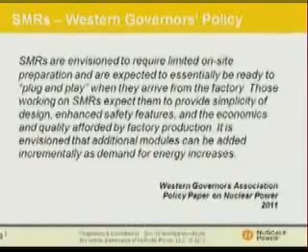This language is out of the Western Governors Association policy paper on nuclear power, completed last year, led by Governor Otter of Idaho, referencing the important role that SMRs can play in energy production and our economy.

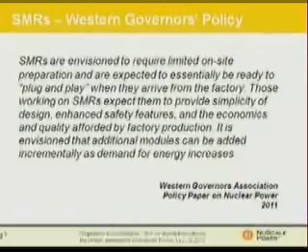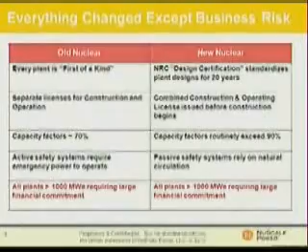So what's happened in nuclear power? I put this chart together because this is what I've witnessed in my career in commercial nuclear power. I'm not an engineer, I'm a business and marketing person, but what happened in the old generation of nuclear power is that every plant was first of a kind. We have 104 operating plants, and except for those that are twin units, every other plant is different. There's no standardization. Now, with the NRC's new process of design certification, we standardize the plant design for 20 years.

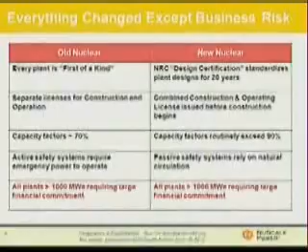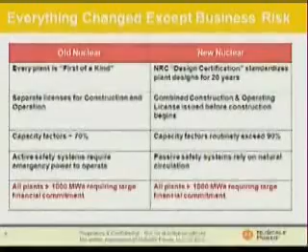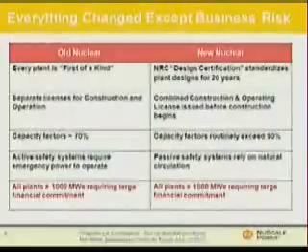And with that, we get the economy that comes from repetition and standardization. As John alluded to, there used to be separate licenses for construction and then a second for operation. That operation license was a big risk that utilities took on. Plants such as Shoreham, such as Seabrook were delayed for years. The owners had to carry the cost of those plants on their books and all of the accumulated interest, which could come to hundreds of millions of dollars a year. Now there's a single license issued at the start. A combined construction and operating license is given before the owner breaks ground.

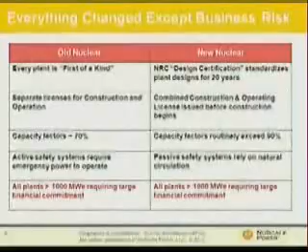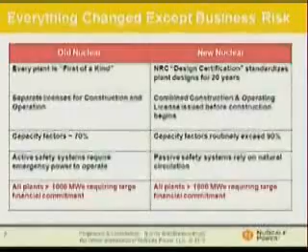The old nuclear fleet up until the mid-90s operated at capacity factors of about 70%. Now the fleet average is in excess of 90%. Some companies like Exelon have fleet averages of 93%. Well, each 1% of operation for a 1,000 megawatt plant, that's 3.65 days of additional full power operation. It's about $5 million in power production right to the bottom line. So moving the capacity factor from 70% to 93% was huge for the industry.

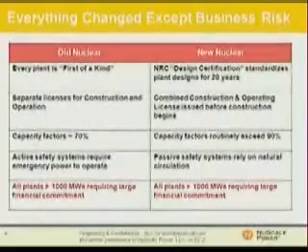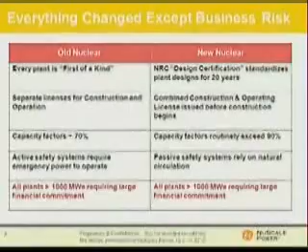In the past, all of the big plants had active safety systems, right? Required emergency power, emergency backup generators. Now the designs for some of the large plants and for all of the SMRs are to rely on natural forces like natural circulation, passive cooling for cooling in emergencies.

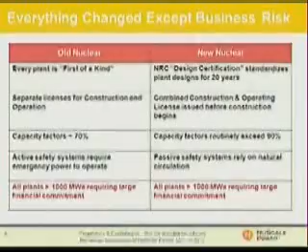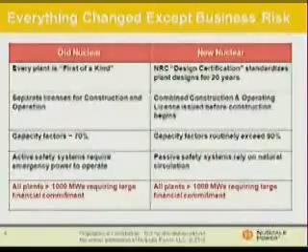In the past, all the plants were large, 1,000 megawatts or more. And in fact, kept getting bigger in order to achieve economies of scale. Well, one of the things that didn't change until small modular reactors like NuScale came along, all the plants were big. In fact, they got bigger and bigger. They got to 1,350 megawatts, 1,650 megawatts, 1,750 megawatts, a tremendous amount of electricity on one shaft, 3 Bonneville dams on one turning shaft. Well, SMRs are changing that.

What's driving the market? I think this is also important information for your Commission's consideration. Aging infrastructure in the United States is going to be a big factor driving the market. We have 330 gigawatts of coal from 1,100 plants.

Half those plants are more than 40 years old. John talked earlier about the retirements that are taking place. We are seeing no new coal plants built in the United States. In fact, we've seen 230 plants canceled.

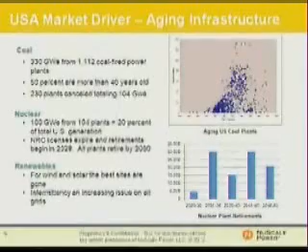Another factor that many aren't paying a lot of attention to, but I think is critical, is that we get 20% of our electricity now from those 104 operating nuclear plants. Even with life extensions to 60 years, all of those plants will be forced to retire by 2050. So the United States faces replacing somewhere between 40 and 60% of its existing infrastructure in the next 40 years.

And then, of course, there's a lot of effort going into renewables. Renewables are great, but many of the best sites for renewables are now gone. And the more renewables we have, the bigger challenge we have integrating them into the grid.

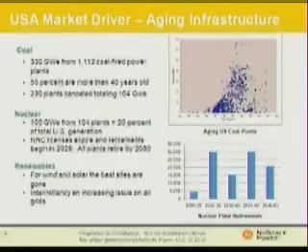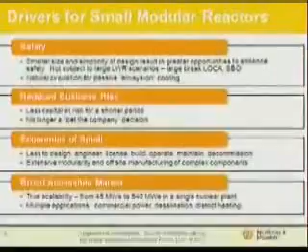So, the drivers for small reactors, the first is safety. With smaller size, we get simplicity, we get a better opportunity to take advantage of passive safety systems to improve the safety of the design.

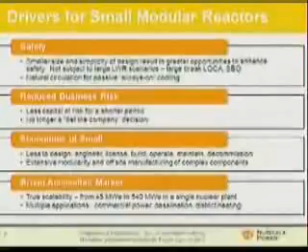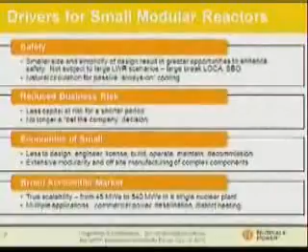Less business risk, right? For the capital cost, there's less money at risk for a shorter period of time. The capital cost of the plant is dramatically less. John mentioned a 36-month construction cycle that they hope to achieve. That compares to 60 months or more for a large nuclear plant.

With the economies of small, and I'll talk more about this, we've been able to take many components out of the plant. So there's less to design, engineer, license, build, and operate.

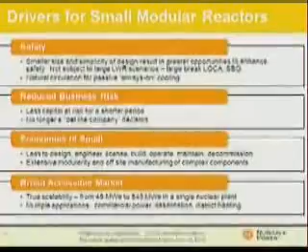We also are striving for as much modularity as we can to get all of the components into a factory and manufactured there. And in that factory setting, you have people whose skills continually improve, you get quality improvements, and you get the benefits of learning by doing.

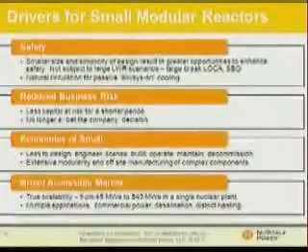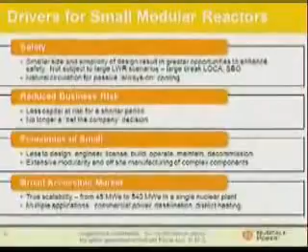And then SMRs have, in our view, a broad, accessible market. For our plant, we have designed a reactor that's 45 megawatts electric, scalable up to 540 megawatts in a utility-scale nuclear power plant. So we think that can bring us into markets that nuclear power never could go into before. And then there are multiple applications for these designs, not just making electricity.

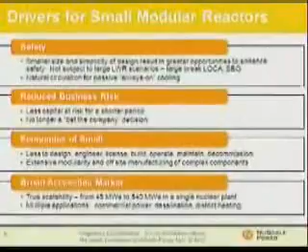We have tremendous interest in desalination in the Middle East, in Northern Europe, in China, in India, a lot of interest in using this technology for district heating.

So, because of the belief in the economies of scale and the need to get bigger and bigger, at NuScale we've coined this term economies of small. And the acceptance of SMRs really has required a paradigm shift on the big nuclear guys. They've always believed that you had to have these big nuclear plants, and it's taken them a while to say, okay, maybe there is some benefit and there are some economies from small nuclear reactors.

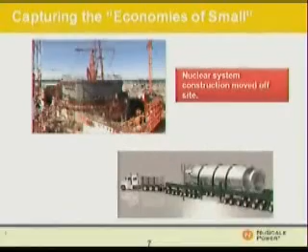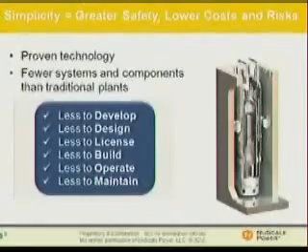As I mentioned, simplicity. With this design, and specifically with our design, we see that there's less to develop, less that we have to design and engineer, less that we have to take through licensing. Once it's licensed, there's less to build, there are fewer systems to operate, and there's less to maintain. So those, to us, are the economies of small.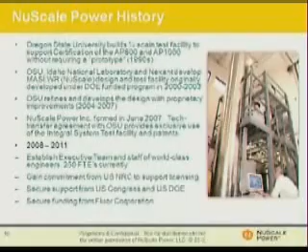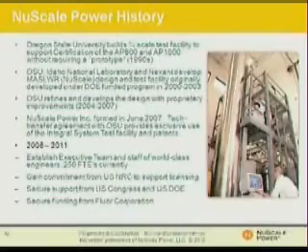Our company. Back in the 1990s, Oregon State, Dr. Jose Reyes, our now Chief Technology Officer, was called upon to build the test facility that was used to license the Westinghouse AP600 and then the AP1000. After that, the Department of Energy came to Dr. Reyes, and he put together a team at OSU and with Idaho National Laboratory and with Nexant to develop the MASLWR. I know you've found that as you were looking at nuclear power, everything's an acronym.

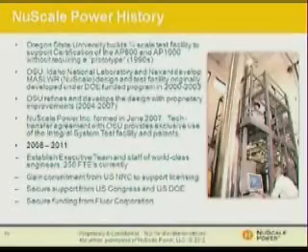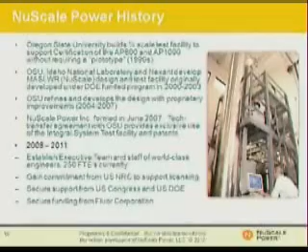So MASLWR was the multi-application small light water reactor. It essentially was the conceptual NuScale design. Dr. Reyes and his team then built a 1/3 scale electrically heated test facility at Oregon State to prove out that design. When that program was over, DOE turned everything over to Oregon State, and Oregon State continued to refine the design. NuScale was formed in 2007 through a tech transfer agreement with Oregon State.

2008, as I said, we received our first funding. We established the executive team. We had our first interaction with the NRC. Dr. Lorenzini and I started going to Congress, going to DOE, telling the SMR story. Last year we received funding from Fluor Corporation. Fluor is a major investor in NuScale. We're not a subsidiary of Fluor. It's a direct investment in the company.

Fluor is a great partner for us. They have more than 40,000 people in 66 countries. They've been in the nuclear industry since its inception. They've built more than 20 plants, designed 3 of them, and they understand the industry and what it's going to take for us to get to the goal line.

So what are we doing? The illustration below shows what one of our plants would look like in an arid location, say eastern Idaho, air-cooled. We are commercializing a 12-module power plant. The idea is to achieve utility scale by clustering multiple small modules together inside the plant.

We're designing this so that it can be built in 2 increments. The first increment is putting in 1 to 6 modules sequentially to get to 270 megawatts, and then after that, adding more balance of plant to get to 540 megawatts.

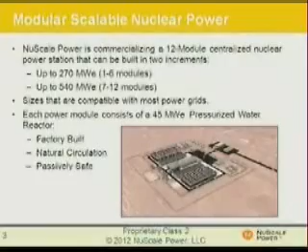How it works - I have an animation on this, but due to time, I'll wait, and if those are interested, I can show it over the lunch hour, explaining how it works.

The unique thing about the NuScale design, and frankly something we're learning has more and more benefits the more research we do, is that we've taken a nuclear steam supply system - a nuclear reactor that has its steam generator inside the reactor pressure vessel. Customarily, they're outside, a separate unit. The reactor vessel is 45 feet by 9.5 feet, and the fuel core is inside the bottom of that.

We take that and put it inside a steel containment vessel that's 65 feet by 15 feet. This is different from the traditional nuclear power plant, where the big concrete dome building is built first and the reactor goes inside. Instead, we have a steel containment vessel. The space between the reactor and the containment vessel is evacuated - it's a vacuum bottle, so it acts like a thermos. That means we don't have to have any insulation wrapping the reactor.

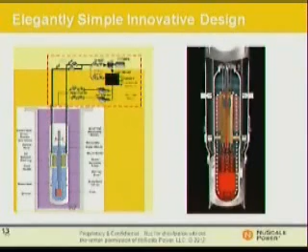Then we take that whole thing and put it in a 10 million gallon pool of water with the other reactor modules. The reactors are installed sequentially, one at a time, after the plant is built, and then refueled sequentially. So the most the operator ever has out of operation is 45 megawatts. The refueling cycle is every 2 years, so we can achieve very high capacity factors and very efficient operations, because instead of bringing in hundreds of people to do the refueling, all of that work is done by the plant staff.

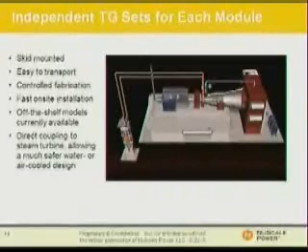Each of these reactors has its own independent skid-mounted turbine generator set. The turbine generator is designed to be water or air-cooled, but it's easy to transport - it's skid-mounted, so installation is fast. Some of the utilities we're talking to have looked at this and said it's great, because they know what to do - they buy a spare, it's inexpensive, and if there's a problem with the turbine, they can pull it out and put in a spare.

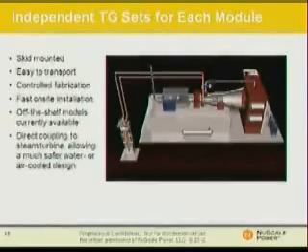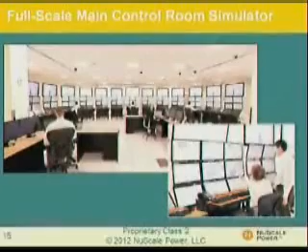NuScale also has a very positive reputation with the Nuclear Regulatory Commission because of our willingness to do things early in the process that many others wait to do at the end. One of those is not only the test facility, which we've had in operation since 2003, but we recently commissioned a full-scale control room simulator at our offices in Corvallis, Oregon. This models the operation of a power plant with 12 reactor modules, and it will allow us to do human factors analysis, which we're doing in partnership with Idaho National Laboratory.

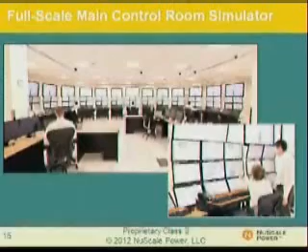INL has a reconfigurable control room, and we're working with INL on our human factors analysis, because one of the things we need to demonstrate to the NRC is that we can competently manage all 12 modules from a single control room.

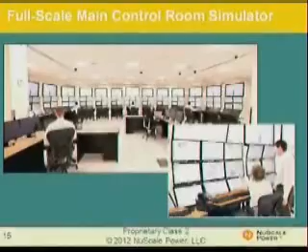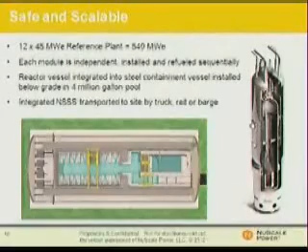This is an aerial view of what the reactor building would look like - you can see it's like looking at an egg carton. A dozen reactors, each installed in their own bay in this 4 million gallon pool of water. On the far right side you see the spent fuel pool, and next to it in the lower right, the module assembly and disassembly area, where the reactors are installed, fueled, put in place, and later taken apart and refueled.

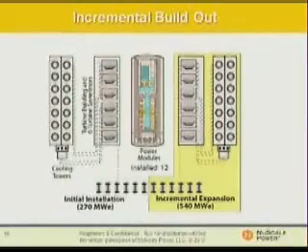This demonstrates the incremental build-out option, where the first 270 megawatts of capacity is installed, and later the owner can come back and add another 270 megawatts. Utilities really like this approach because it allows them to build a plant with a lower initial capital cost, put it into operation, start generating cash, and demonstrate that the plant is used and useful.

We think, in fact we know, that our design offers an extra layer of safety, which is so important. One of the things is that we have eliminated any opportunity for a large break loss of coolant accident. There's simply nothing large in the plant to break to lead to a large break LOCA. There are no design basis accidents that can uncover the fuel.

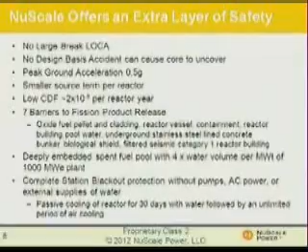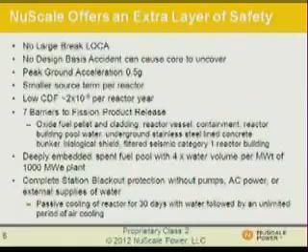We have a very robust design from a seismic standpoint. The peak ground acceleration we're designing to is 0.5 Gs. For comparison, the safe shutdown earthquake, or the maximum earthquake the Trojan nuclear plant was designed for, was 0.25 G. So this also gives us a broader accessible market. We have a smaller source term per reactor because there's simply less fuel in it, and low core damage frequency, 2 times 10 to the minus 8. I'll talk more about the additional barriers to fission product release, and then the very large pool of water, which is our ultimate heat sink.

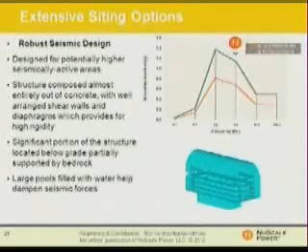I just referenced the seismic design. This is the curve, if you will, but we believe that this will be a significant enhancement in safety for power plants.

In a conventional light water reactor power plant that we have today, the barriers between the fission product, the fuel if you will, and the environment are three. It starts with the fuel pellet, then the fuel rods themselves, the cladding, and then the next barrier to the environment is the reactor vessel itself, and the third and final barrier is the containment building.

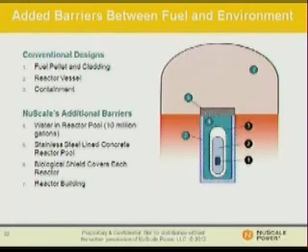In NuScale's case, we've added four additional barriers. First, we've got all of the water in the reactor pool, and around that we have a stainless steel lined concrete reactor pool with biological shields covering each of the reactors. Then we have a class 1 seismic building, the reactor building over it, which is designed to withstand commercial aircraft, typhoons, hurricanes, and the like. So a number of additional barriers to protect the public.

Fukushima led us to do quite a bit of additional analysis, and this is an example of where we found that our design really is enhanced because of our ability to remove heat through the containment vessel into the water. When a reactor trips and shuts down, it still is producing about 10% of the thermal energy it had at full power. With a large reactor, it'll go from 5,000 megawatts thermal to 500 megawatts, three times what we have at operation. Our operation is 160 megawatts thermal, so one second after trip, it's down to about 16 megawatts thermal, but that heat still has to be removed.

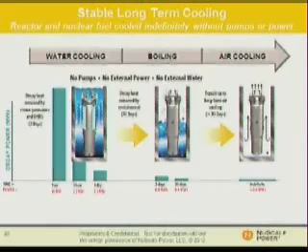We've designed this so that the first step is to use heat exchangers on the outside of the containment vessel, which can remove heat for about 3 days. At that point, valves open and allow water to leave the reactor vessel as steam and condense against the side of the containment vessel, transferring its heat into the reactor pool. Then when the containment vessel floods above the reactor core, valves open to allow that water to recirculate back into the reactor. There's no forced or mechanical circulation required.

As the decay heat continues to be removed by this method, after about 30 days, the water in the reactor pool, if we couldn't put any more water into it, would boil off. At that stage, the thermal energy is down to about 400 kilowatts, and the natural circulation of air over the reactor vessels—we've done this analysis for all 12 reactors in this situation in the reactor pool at one time—would be sufficient to keep the reactor cool and the fuel safe, and frankly, to protect the asset.

Our pathway to commercialization: our goal is to receive design certification from the Nuclear Regulatory Commission by 2017. We've been working with the NRC since 2008, and we're now in what's called the pre-application phase. That allows us to work with the NRC staff to identify potential issues and agree on a pathway to resolve them, or answer questions, before we file our formal documentation, which we will do in the next two years. That starts the formal process.

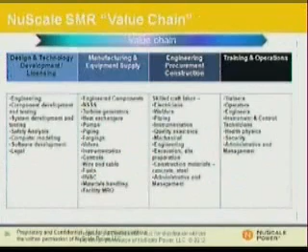And this may also be of interest to the Commission because we've looked at what we would talk about as the value chain for SMRs, and this may be where Idaho can find roles for itself. And it starts with our design and technology development. All of the folks that we're working with on everything from engineering to legal support, lots of work in software and codes analysis, software development, but then it's all of the manufacturing and the equipment supply for these plants.

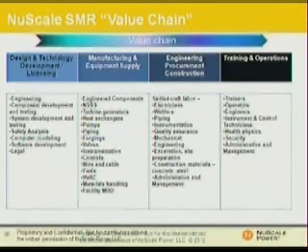And I think a real benefit is that once a manufacturing facility is built for any of the components, because they're standardized, that's going to be a long-term facility. And the people who get jobs there are going to have great jobs for a long period of time. It's going to be of real benefit to the community that hosts it. And then when plants are built, it's all the craft labor and everything that goes into the plant. But once a plant is in operation, it's everything associated with operations.

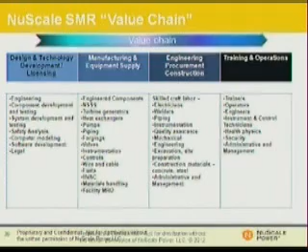We're looking at staffing for our 540 megawatt plant in the range of 300 FTEs, including security, but those are nice paying jobs. In fact, I was in a meeting with a prospective customer that doesn't currently have a nuclear plant, and they were looking at the payroll figures for these plants. They said, I think I want that job. So yeah, these are great jobs once you get them into our community.

If I can figure out how to switch, I have one more slide that I think might be of interest, and it shows, of the people who are now at NuScale, where they came from, what their degrees are, how much experience they have.

So we put this together recently for our own edification as we've been building staff. We're up to about 150 in our operations now in Oregon. 130 of those are at our Technology and Design Center in Corvallis, and the rest of us who are more administrative are at a small office in Portland, Oregon. And engineering is probably 80% of our people.

So you can see that we have a lot of people who have 8 to 15 years experience, and a lot of people who have, frankly, more than 25 years experience. In a project of this nature, a lot of it is project management, so we have fewer people who are fresh out of school. They're doing the more fundamental work, but a lot of our senior people, and there's a lot of gray hair in our operation, there's a lot of gray hair and a lot of young people, but they're managing others through the project.

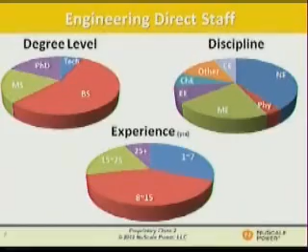And now I'll be happy to answer questions. I hope that was helpful. Oh, it's very helpful. Thank you. Members of the Commission, what questions do you have?

We just pushed you too hard and everyone's ready for a break? Or Mr. Kotek? Thanks very much. That was an excellent presentation.

At the end of the day, I've got to imagine what you all are interested in is seeing orders for your product. And from what I've seen with the large plants that are being built in the Southeast, for example, and with other proposals around the country, cost of capital has been a real big issue, plus the duration of time over which that capital is tied up, and you're clearly addressing the length of time question with this design. How about the cost of capital question? Are there things that the states or the federal government can do to help address that issue?

That's a great question, and it's particularly important with capital-intensive projects, which nuclear power plants are. A change in the cost of capital can make a big difference in the life cycle cost of the power from the plant, because you're carrying a large amount of debt or paying back equity over a significant period of time. And for example, a 1% change in the weighted average cost of capital can mean a difference of 2 cents a kilowatt hour in the price of power for the plant. Huge. So some opportunities are to lower the cost of capital.

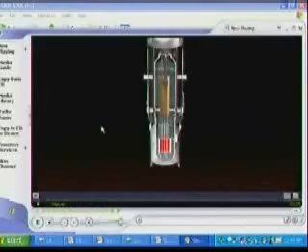This video demonstrates how the reactor operates, and you can see the control rods were just pulled out of the fuel core. The core starts, the fission process begins, begins to heat up water. As the water is heated, it loses density, so it rises inside this riser inside the reactor vessel. It's pulled out over the top, and then it passes over these helical coil steam generators, turning water in those generators into steam. As it does that, it's exchanging its heat.

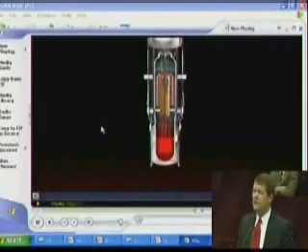The water then gains density, becomes heavier, and gravity pulls it back to the bottom of the reactor, where it simply recirculates over the fuel another time. As the steam is created, it goes through 2 steam lines into the turbine, which then turns the electrical generator. And that moved through it quickly.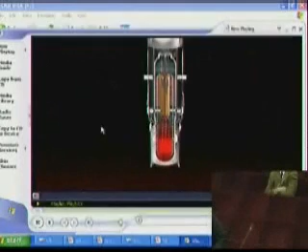But when we talk about small, for example, if you've been through a large nuclear power plant and you look at the lines that carry the steam to the steam generators and the steam lines out of the steam generators into the turbine, they're big enough that you can walk through them. Our steam line is 10 inches in diameter. The feed water line that takes the water back from the condenser is only 3 inches in diameter. So a real benefit of having small.

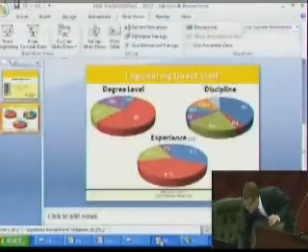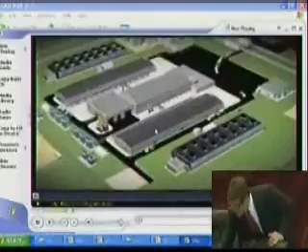And this animation shows the process for installing the reactor modules inside the reactor building. So this central building is the reactor building, housing both the reactors themselves and the spent fuel pool. It also has the control room below grade. So all of the safety-related equipment is in this building.

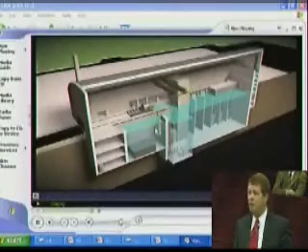The reactors are shipped to the plant in 3 large components. The first component is the bottom of the reactor vessel itself. And you can see here it will be lowered into the reactor pool. The spent fuel pool is to the left. In this animation on the far right, you can see that there are already 3 reactor modules in place.

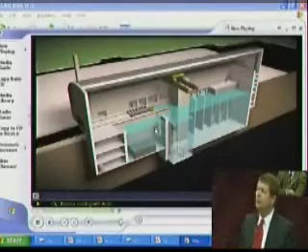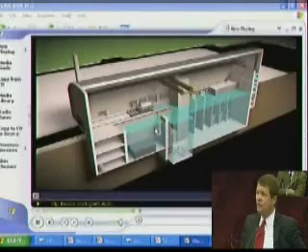And the next step is to bring in the lower portion of the containment vessel. The whole systems, when they're placed in the bays, don't rest on the ground. They're actually suspended by a trunnion, which allows for some small amount of movement, should there be an earthquake. So it's part of the seismic dampening effort.

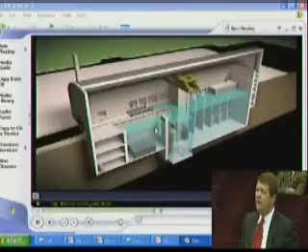And each of these components is placed in specially designed cradles. And once the lower containment vessel is in, and the lower reactor vessel, the fuel is placed inside the reactor vessel internals.

So new fuel, of course, is brought to the plant before the reactor vessels, and it's placed in the spent fuel pool. The spent fuel pool also houses new fuel.

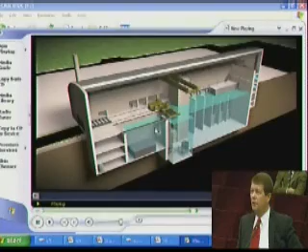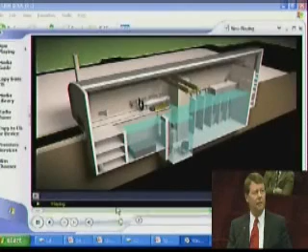And then the final component to come to the site is the upper portion of the reactor vessel and containment vessel. This is one combined unit. There's pretty much nothing in the space between the reactor vessel and the containment vessel, but all of the reactor components, including the steam generators, are housed in this upper portion.

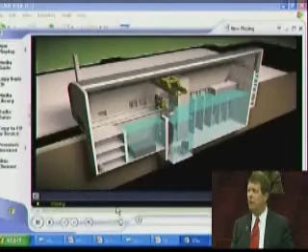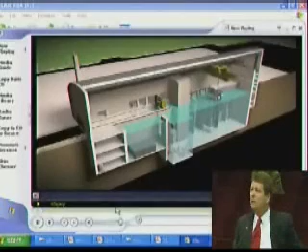So it's lowered, it's upended and then lowered, and then the bottom portion of the reactor vessel that contains the nuclear core is attached. All these components are flanged and bolted. Then the lower third of the containment vessel is attached, flanged and bolted, and the system is moved into place, into its reactor bay. And then the biological shield is placed over top of it.